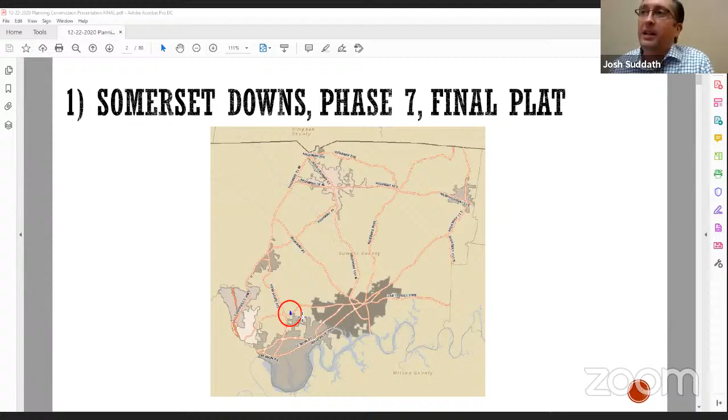Mr. Chairman, the first item on the agenda tonight is Somerset Downs Phase 7 final plat. What's being asked for is approval of 27 lots contained on 16.92 acres. The owner is Michael Shular. It's located on Luxborough Drive Extended, which has been extended for this phase. This subdivision phase adjoins Long Hollow Pike. There's no direct access proposed onto Long Hollow Pike though.

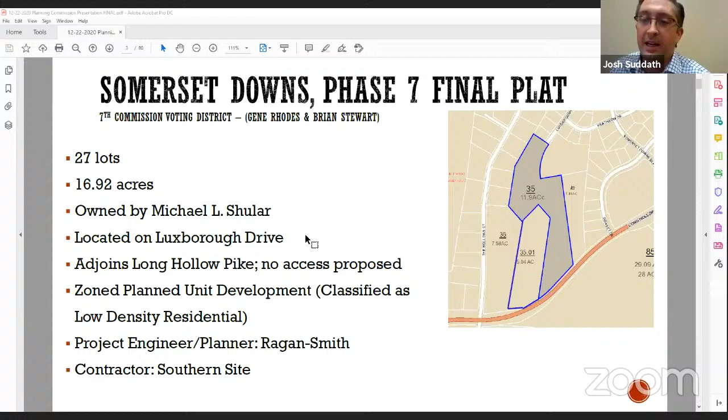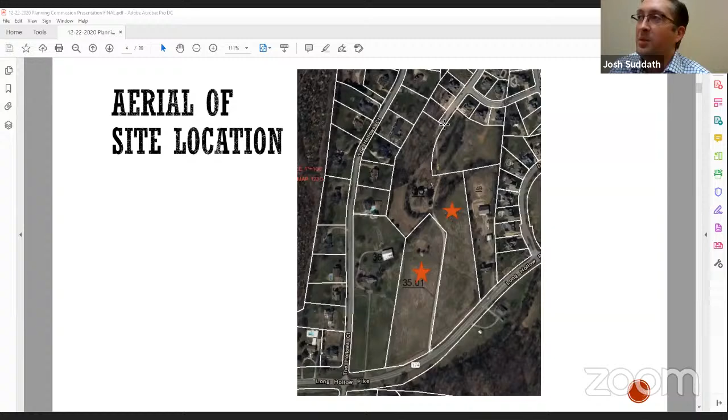It's currently zoned Planned Unit Development and was classified at the time of approval as low density residential Plan Unit Development. The project engineer and project planner is Ragan-Smith. George Welch and Jake Benson are the engineers of record on this project, and the contractor has been Southern Site Design. This is an aerial of the site location that you can see here. You see these two parcels that make up the entirety of Phase 7, and you can see Luxborough Drive here where it was to be extended.

A little bit of background on Somerset Downs. The Planning Commission is very familiar with Somerset Downs over the last few years, but it initially came up in 2006, had the first phases that were even before that under a different developer, but phases 4, 5, and 6 began back in October 2006, got through the approval process then. For phase 7, that was brought in separately in 2017, just before I started here at the county, and received approval by the county commission to amend the Plan Unit Development to add in this phase.

A preliminary plat was brought in by the developer for phase 7 in July of 2019 under the new subdivision regulations. And after they got preliminary plat approval, they began infrastructure installation at that time. It's been ongoing ever since. So about a year now, they've been working on getting the infrastructure in. This is the Plan Unit Development as it was amended in.

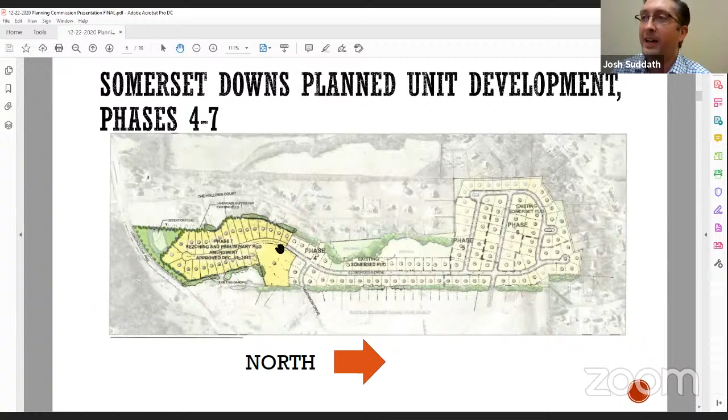This was an exhibit provided back in 2017. This zooms in on where phase 7 is located. This is the final plat that's up for approval here tonight.

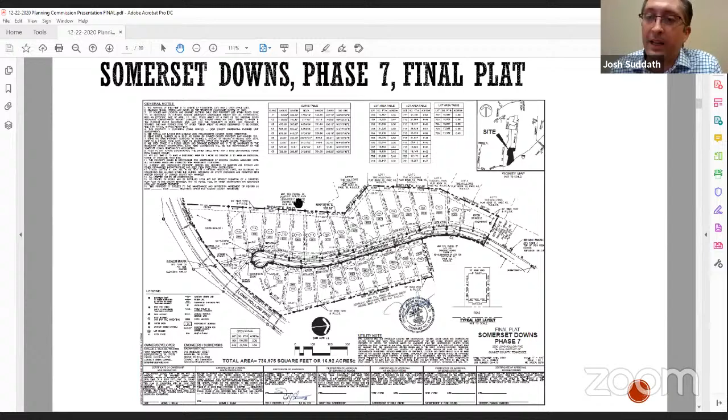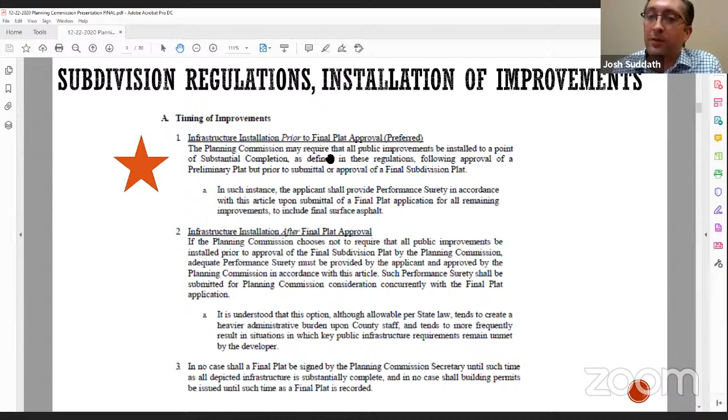It's been a requirement under the new regulations, and something that's benefited the county, that infrastructure be put in on these developments as they come through. When they get preliminary approval, they get their infrastructure in, then they come back to the Planning Commission. Our subdivision regulations lay that out as the preferred alternative: infrastructure in prior to final plat approval. It's been enforced for a while now and seems to be paying good dividends.

Water and sewer are to be provided by the White House Utility District. Fire hydrants are depicted along the proposed extension of Luxborough Drive, and they've actually been installed at this time, at the required spacing, meaning no lots more than 500 feet from a fire hydrant. I think they've actually got their spacing a little closer than that. Fire protection is to be provided by the relevant volunteer fire department, which I believe is the new Shackle Island Volunteer Fire Department.

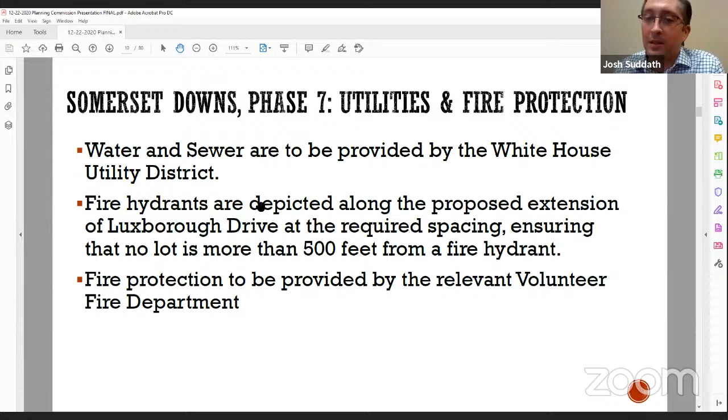As far as streets, Luxborough Drive has been extended to the south, and I've got some pictures of that here in just a few minutes that I'll show you. They've extended it about 1,350 feet, terminating in a cul-de-sac.

It's going to be a public street. The county engineer and his staff have been inspecting the street as it's been installed through the phases of putting down the base, the stone, and the binder coat that's on now, and the curb and all that. They've checked everything and conducted roll tests and everything like they're supposed to do to make sure it's done in accordance with county standards. And that has been done. That information has been provided to the highway department.

50 feet of right of way with 12-foot travel lanes, so a 24-foot wide road. This meets the county's requirements under which this plan was approved. Per the approved master development plan, sidewalks are to be constructed on one side of the road. That was approved for the entire Somerset Downs plan unit development back years ago, in 2006.

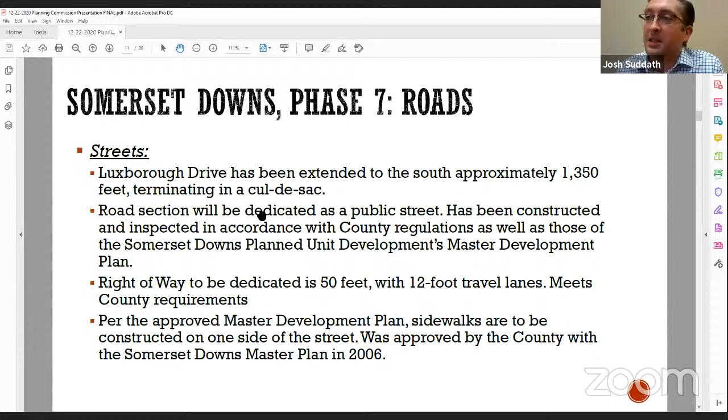On-site drainage: there are 3 stormwater detention facilities that have been constructed at this time. They've been functioning as sediment basins during construction, and they're depicted on the final plat. 2 of them are dry detention basins, which catch stormwater and release it during rain events. One is a water quality bioretention facility meant to satisfy the state's and the county's water quality requirements, capturing and filtering rainwater through layers of media. Those have all been installed. They may have just a little bit of work to go on the water quality pond, but they're real close, and that's not anything we have concerns about getting completed.

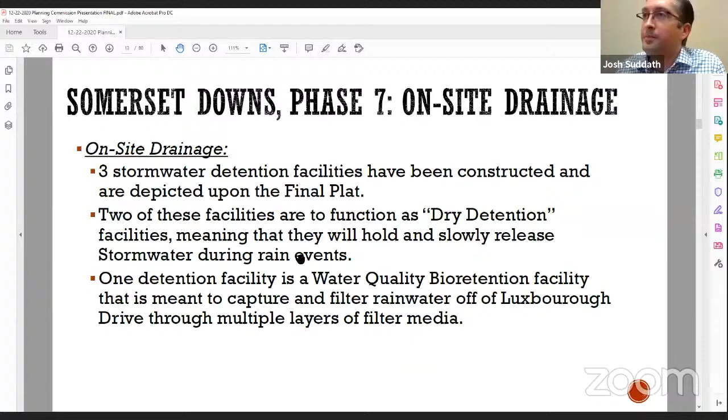On-site drainage, they turn in lots of calculations like we require them to do, and everything indicates that it's going to address water quantity and water quality.

Somerset Downs HOA will take care of all the stormwater maintenance over the long term, but during construction it's been the developer's job to take care of all that stuff. Once the final plat's recorded, they'll probably be selling these lots to Creekside Homes, and Creekside Homes is going to take over as the owner of the SWPPP, the Stormwater Pollution Prevention Plan, and they will be the accountable party for maintenance of the ponds and that kind of thing.

The developer is required to enter into a stormwater maintenance and inspection agreement with the final plat. They've prepared all that and turned it into the county stormwater manager, Joe Phillips. He's reviewed it and is good to go with it. They'll be recording that just as soon as they record the final plat, and that will bind the developer and then the HOA to acquiesce to us inspecting the ponds and make sure that they're taken care of.

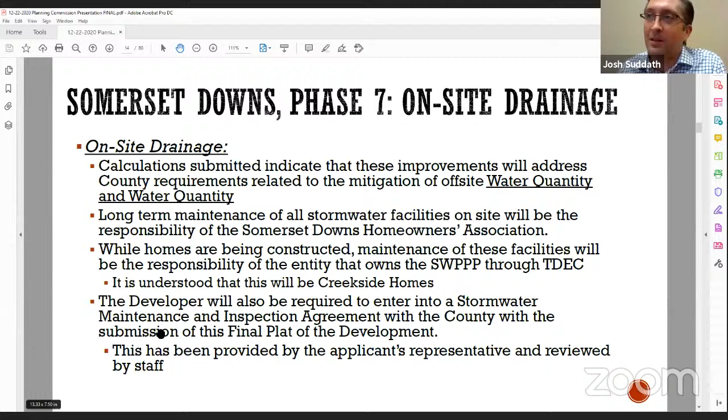This is just to show you where these ponds are. Pond 1 is here by Long Hollow Pike—it's a big detention basin, if you drive by you can't miss it. There's a much smaller water quality pond that takes that sheet flow, coming off of the road.

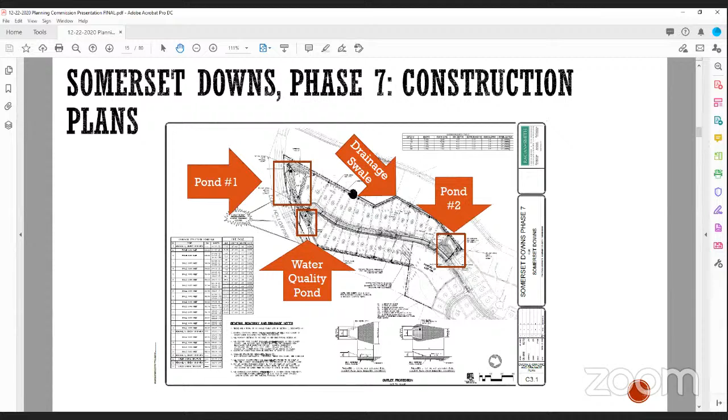There's a long drainage swale that they've installed that I'm going to show you pictures of in a minute. It goes down here to pond 2. We really spent a lot of time with the developer and the contractor. We had a lot of concerns about the Hollows neighborhood, who y'all heard a lot from over the years. We wanted to make sure they were not negatively impacted by this development to the extent possible of this phase. I think overall everybody did a real good job making sure that was the case.

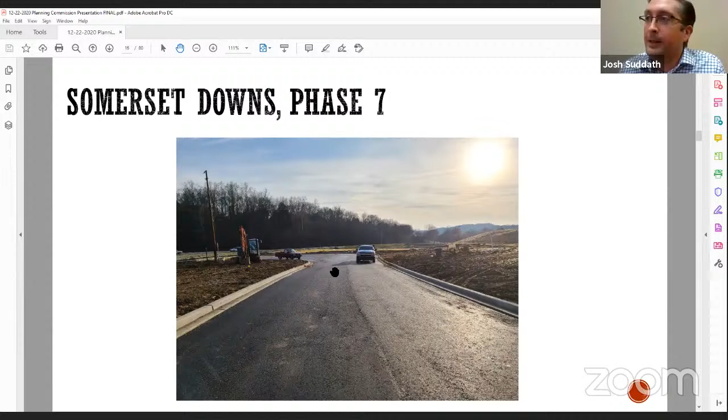So here's the few pictures I've been talking about. This shows you the state of the road right now. We require this now: before you start building the houses, you've got to have your road in, and before you can record that final plat, you've got to have your road in. So this is where it's at. It's got the binder coat down. They provided a bond to the highway department in an amount that's going to cover the top coat of asphalt, which will have to be put down in the next few years once they get the houses more or less complete. So the highway department is good to go on all that. That's just another picture of the road, as you can see here.

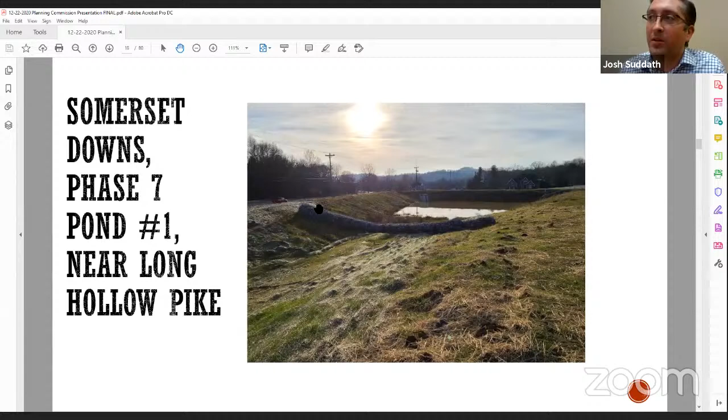This is detention basin number 1 by Long Hollow Pike. Here you see this red truck. They've put lots of measures in these gabion baskets to help slow the stormwater down and filter it, that kind of thing. This is the long swale that I was talking about.

Over here is the Hollows neighborhood. What we did was have them construct - and this is to the credit of the county engineer and stormwater manager, Joe Phillips and Richard Jones - this big swale right here. This was all built up in a way to try to keep that water from going off-site onto the Hollows and direct it where we needed it to go, which is here. This detention basin right here is where it all goes. This is the kind of stuff that having the county engineer and the staff we have now pays a lot of dividends, because they go out and make these folks - not necessarily make them - we work with them to make sure that stuff is done like it needs to be done.

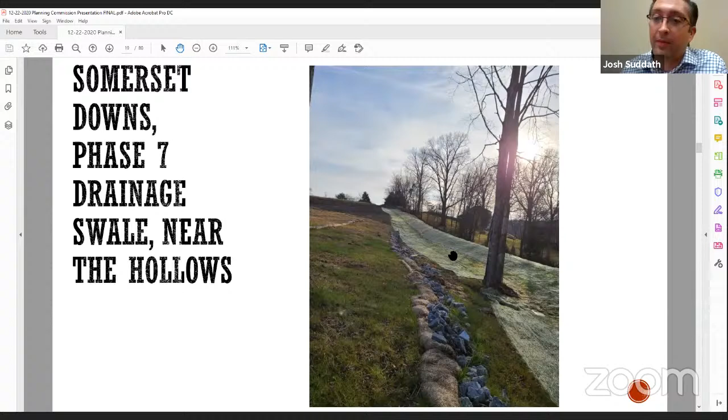And the contractor was incredibly responsive. The developer was very responsive, and the staff did a real good job coordinating. Early on in the construction we had some issues with mud getting off site. The contractor went out there, cleaned driveways, took care of it, and made field adjustments to make this swale deeper where we needed to, to make sure that stuff wasn't happening. So we got a lot of positive comments from the adjoining property owners, the Hollows folks, who really thanked us for how things have changed to handle these issues now.

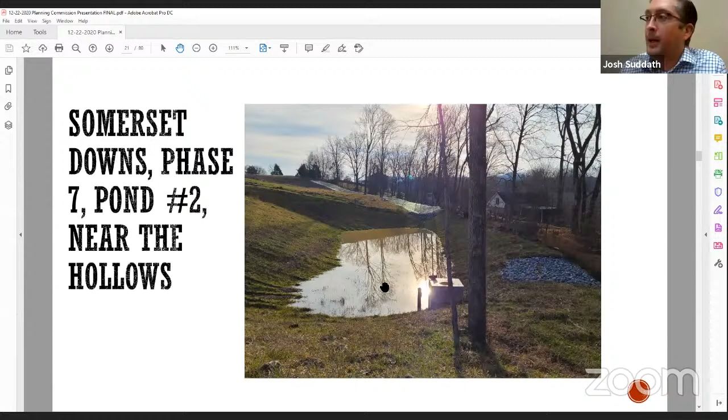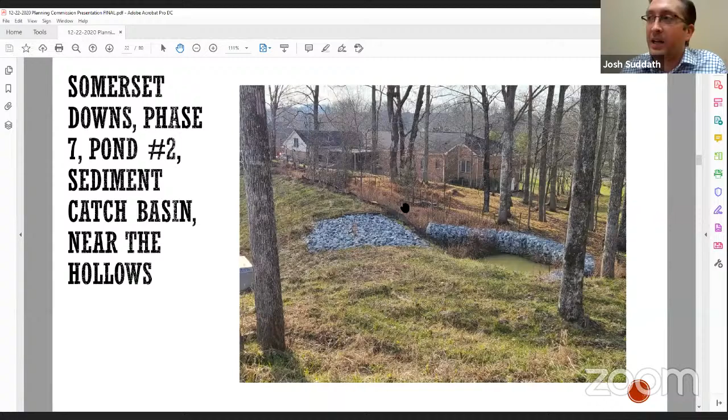And then you can see how the water flows here. This will be a permanent feature, and it's all going to be in a drainage easement, that entire swale. Basically that pond goes through a pipe here and collects additional sediment before it slowly escapes down toward the Hollows court, which is the natural drain. But it makes sure that it goes slowly.

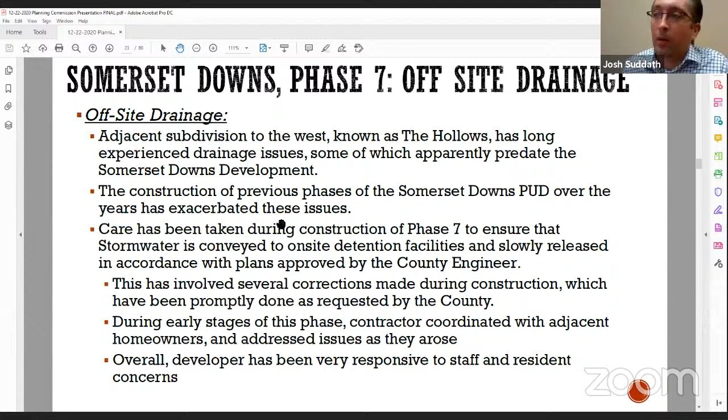So a lot of this I've already said. The Hollows has had a lot of issues over the years. We worked with everybody to make sure this phase went as smoothly as it could, without a lot of negative impacts on the surrounding property owners. Everybody did a real good job with that. I'm real happy with the way things went.

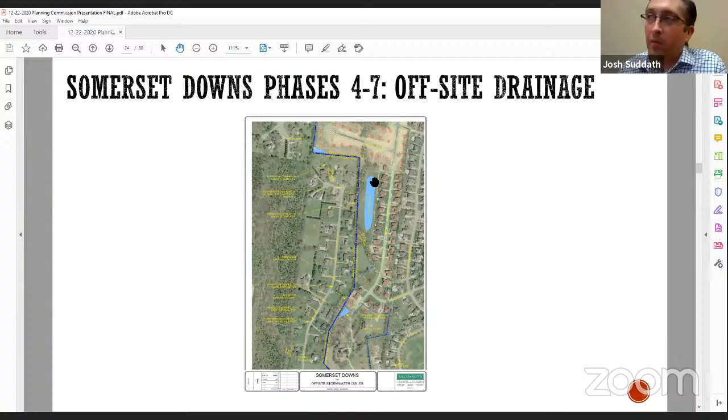Another issue we worked with the developer on, as the Planning Commission knows, is there were previous phases to this one where the county's process was different. There wasn't a lot of staff oversight or ability to oversee a lot of this stuff. So there were some things with previous phases left in a state that I wouldn't consider complete, and I don't think the county engineer would either. So we worked with them, and they've made a lot of improvements to fix a lot of that stuff, but there's one thing still hanging out there: this phase 4 and 5 big detention basin here that follows Luxborough Drive.

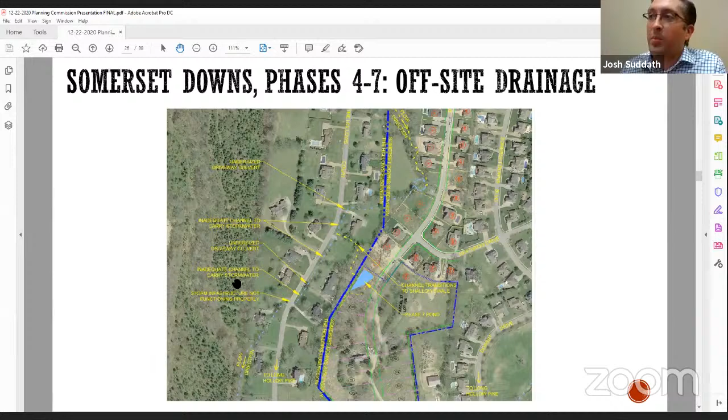It eventually flows and discharges in a similar spot to where this phase does, so there's a connection in terms of the stormwater between this phase and the previous phases. We want to make sure we're trying to get as many of those old problems solved now with this more or less final phase of the development.

That old pond was not necessarily built to plan years ago. There were some improvements we had them make, like a diversion berm and other things that helped. But we never got as-builts on that pond, and it got turned over to the HOA before it was really ready. It should still be managed by the developer now, so we've worked with the developer to look into remedying this and see what else needs to be done to get it into a permanent condition.

Phase 7 and the old phases all discharge eventually to the same point to some extent, so there's a connection between the earlier phases. We've obtained a commitment from the developer to provide a letter of credit to the county in the amount of $75,000 on this phase 4, phase 5 pond, that big pond there.

What that's going to involve is Ragan Smith going out to do a field survey and shoot as-builts to see if it was built to plan. If it turns out the pond's good to go and built to plan, nothing needs doing, that's okay. But if it's just functioned as a sediment basin and sat there for years, it may need to be excavated a bit and shaped before the developer goes on down the road.

They'll get those as-builts to us, and Richard, the county engineer, will determine what needs to be done. We'll hold that letter of credit to make sure it gets done, and we've got this in there as a condition of approval on this phase. We've talked with the developer and the project engineer on that today, and I think we're all on the same page there. This should hopefully sew things up and finish issues that have been hanging out there for a long time, along with everything done on phase 7.

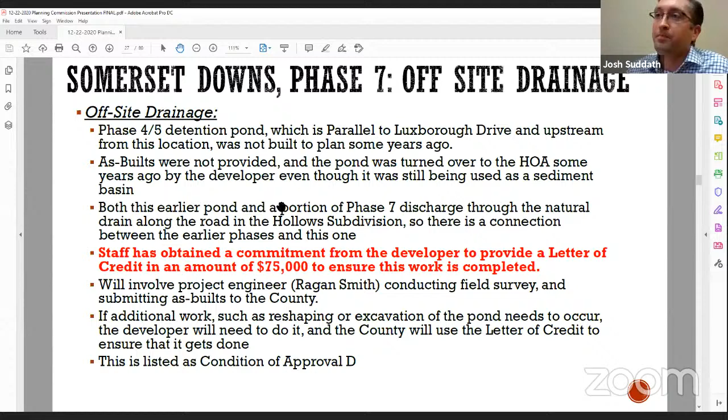So in summary, all infrastructure has been installed to a point of substantial completion. It's been inspected by staff. A bond's been provided to the highway department for the road, including surface asphalt whenever they need to install it. A letter of credit's been provided for 50% of the overall cost of stormwater to us in planning and stormwater here in development services. That'll ensure maintenance of these ponds over the next several years, so if anything fails, we can require it to be fixed. They've obtained all the signatures on the final plat except for mine, so that's good to go.

We'll do another ride-through just to make sure nothing's been missed. We always have it as a condition of approval that if there's any punch list items needing fixed, they'll need to take care of that. The as-builts have been approved—I don't know if I said that already, but those are good to go on phase 7.

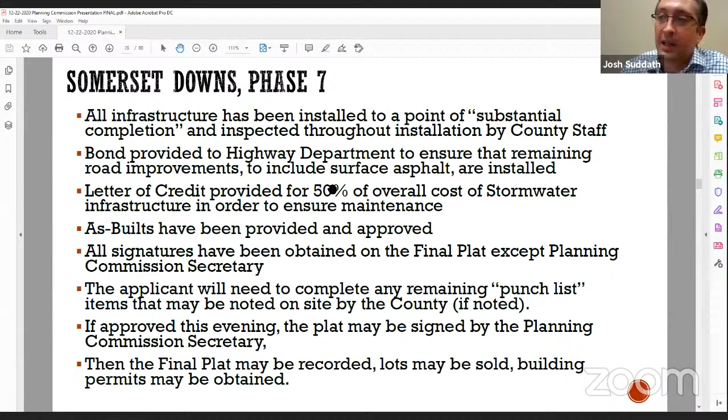So if you guys approve this evening, I'll be able to sign it tomorrow, or as soon as we get the $75,000 letter of credit I mentioned a minute ago. We'll hold the signature until we get that. Then once I sign it, the plat can be recorded, they can sell the lots, and they can obtain building permits.

The stormwater maintenance inspection agreement has to be recorded. They've given it to us; they just have to record it with the plat. They have to maintain all their bonds and letters of credit until we say they can release them.

The other two options would be to approve it without conditions or to deny it. So, Mr. Chairman, that concludes my presentation. I know George Welch and the developer, Brian Carroll, are in attendance tonight and can answer questions if the Planning Commission has any.

Would any one of the representatives of the owner like to speak or comment? This is George Welch with Ragan Smith. I think Josh did a very thorough job. We have nothing to add, but we're certainly welcome to answer any questions if you have any. Anyone else? Any questions from the developer or his engineer?

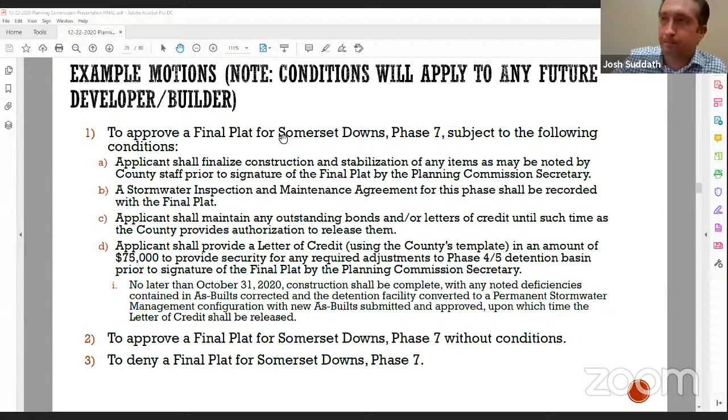Mr. Chairman, with item number 2 deferred, the next item on the agenda is Laurel Park, formerly the Westbrook Development, Phase 1 preliminary plat. This segment of the development consists of 34 proposed lots on 13.21 acres, owned by Tennessee Home Sites. The builder, as I understand it, is Patterson Homes, a firm that's active here in Middle Tennessee. They've done a lot of work in Williamson County and a few other counties around Middle Tennessee.

This project is located on Long Hollow Pike. It's zoned planned unit development, classified at its approval as a medium density residential planned unit development. Utilities are provided by White House Utility District. The project engineer and planner representing this project is CSDG, Civil Site Design Group.

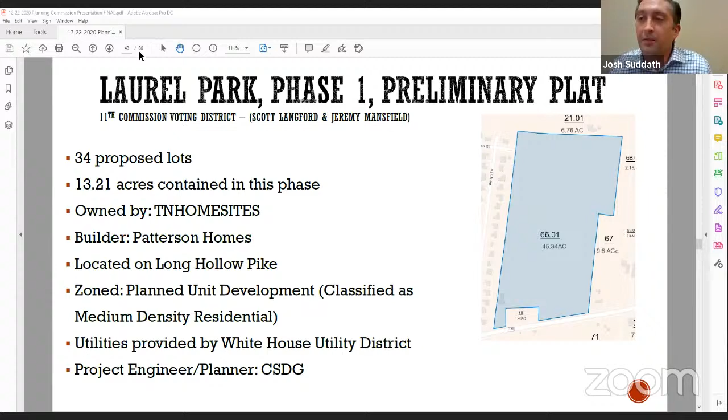This is an aerial photo of the project location. As I said, this is the Westbrook development that was approved some years ago. Kellen Lane is over here -- I think this subdivision is called Victoria Place subdivision. This is the Cumberland Presbyterian Church next to it, and then Beech High School is off just to the east.

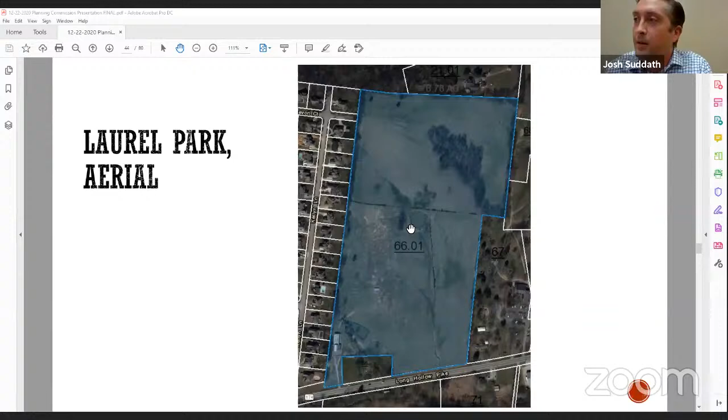The street view of the site shows some rolling topography with a natural drain flowing through, almost to the center, slightly off center of the site. I want to give a little background, Mr. Chairman, if I can, on this one. Like I said, it's been around for a while, kind of kicking around. They had a lot of issues with TDEC that they had to get worked out before they could come back and get to this point.

It was originally approved. The final master development plan was approved by the Planning Commission in December of 2017. That was after it had been approved for rezoning and a preliminary master development plan by the County Commission the same year.

After they got those approvals, it's my understanding that there were a lot of issues encountered that weren't totally anticipated with TDEC, as far as there's a ditch located on this site that TDEC classified as a stream harboring aquatic wildlife and that kind of thing. And it brought the project pretty much to a halt for a number of years.

This eventually got resolved, I believe, earlier this year. So following TDEC approving their solution offered on this, the changes that TDEC required had to be worked into the revised master development plan. So they submitted that basically under the new zoning regulations on November 6, 2020.

As part of that, the request was to change the name of the project from Westbrook to Laurel Park, which is not a significant change. It's a name change.

Staff reviewed it. The Planning Commission may remember an email coming out about this, or several emails coming out about this. We reviewed what was submitted in order to determine whether it was a major change, which would mean it has to go to the Planning Commission and the County Commission, or a minor change, which can be approved by staff.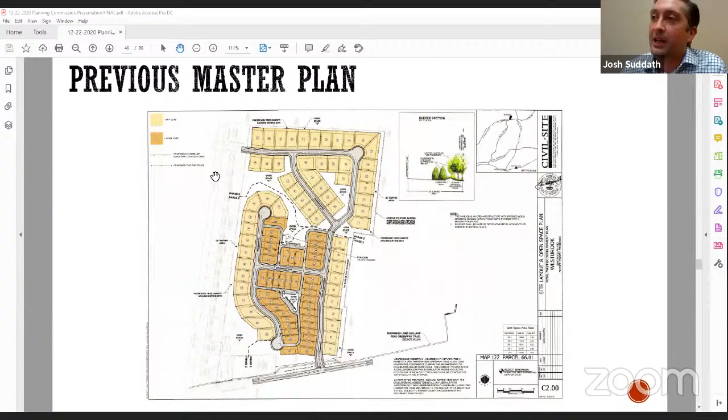The biggest change is right down here. This right here is where the change occurred. This is where that stream I was talking about, that pond that comes down here and drains toward Long Hollow Pike. This is a natural stream, and TDEC required this area to be set aside as a conservation easement, is essentially what happened.

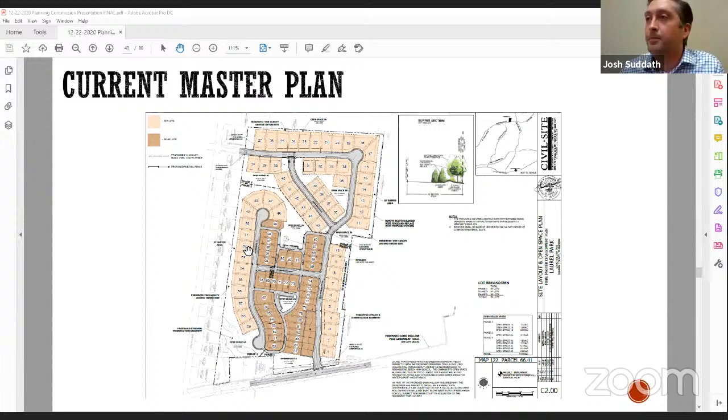And so that's the biggest change. And to accommodate that, they had to shift some lots over. If you look, you'll see how they just kind of shifted a little bit and changed. But there's nothing substantial that changed with this subdivision or with the development.

And so the status of it, with it being approved administratively, the county's adopted a new set of zoning regulations, and the applicant has revised the plan to meet all those requirements. What that means is that their master plan has about twice as many pages as it did before, because we require a lot more detail. We've got a lot more landscaping detail and that kind of thing than what we had initially.

And the plan was revised under the new regulations November 10th, 2020. What that means is they have a year to get a preliminary plat approved, which they're requesting approval of tonight. And they have until November of 2023 to get a final plat approved, which means they got to have all their infrastructure in to get that final plat approved.

The preliminary plat, likewise, was approved the same night three years ago. We had them submit a revised preliminary plat, and in looking at it, we determined that the Planning Commission needed to review this preliminary plat tonight.

The preliminary plat has different thresholds than the overall master plan because it's really a construction document. It's very detailed and spells out exactly what is to be constructed. We felt it needed to go back to the Planning Commission because it technically expired, and because they had made some changes that are called out in the subdivision regulations as a reason to amend or get a renewal on a preliminary plat.

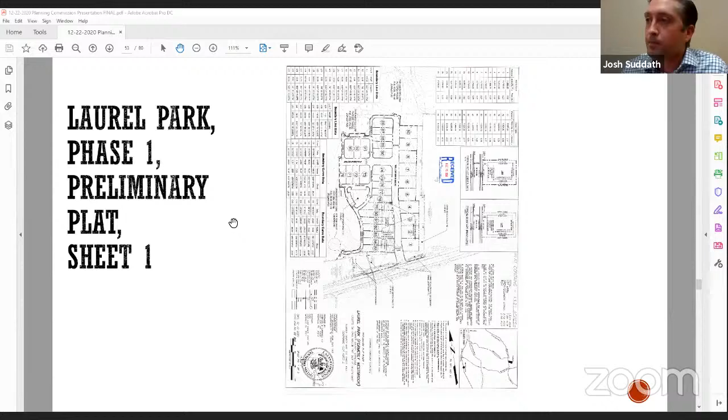So this is the phase one preliminary plat. I reoriented this one so it's north to south here. You see Long Hollow Pike, and these are the lots proposed for construction under this phase. This zooms in a little bit so you can see the plat and the lots contained on it.

Just another plan sheet, and this is the final sheet, the northern segment of phase one.

What's proposed, both in the master plan and the plat and construction plans, is that the development will require the widening of Long Hollow Pike. That's all indicated on the construction plans and the preliminary plat as it needs to be. We've got it as a condition of approval that Long Hollow Pike has to be widened in accordance with those plans for phase one, so they're not going to be able to record the plat or sell lots until that's done and open for traffic.

The internal road network will be dedicated as a public street, built in accordance with the county's subdivision regulations as well as the Laurel Park Master Development Plan. The right-of-way is to be dedicated at 50 feet with 12-foot travel lanes, which was what was approved in the original approval by the county commission.

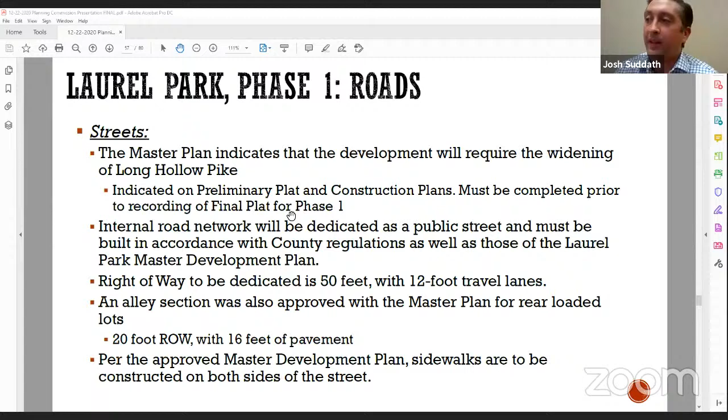Some of these lots are going to be rear loaded, which I'll show with an alley section in a minute. That was approved with the master plan: a 20-foot right-of-way with 16-foot pavement for those rear alleys. Per the approved master plan, sidewalks are to be constructed on both sides of the street.

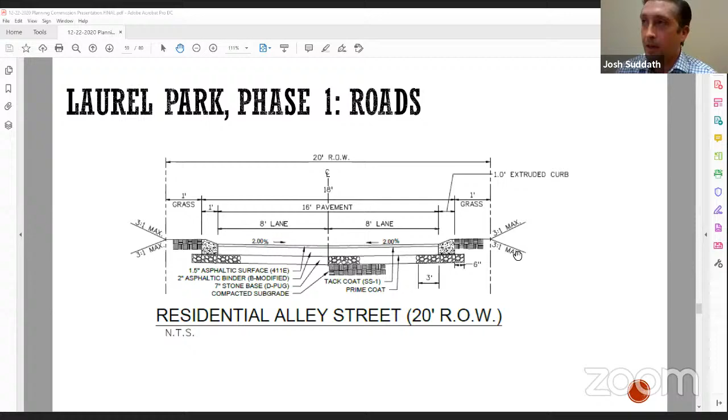This is from the construction plans, and it gets very detailed on what they turned in for Long Hollow Pike improvements. You see there's a left-hand turn lane that's going to need to be added, and additional spacing, so that along most of the frontage Long Hollow Pike will have to be widened in accordance with a traffic study turned in some time ago. This zooms in further, and you'll see there'll be a right and a left turn out, and one lane in, here into the subdivision.

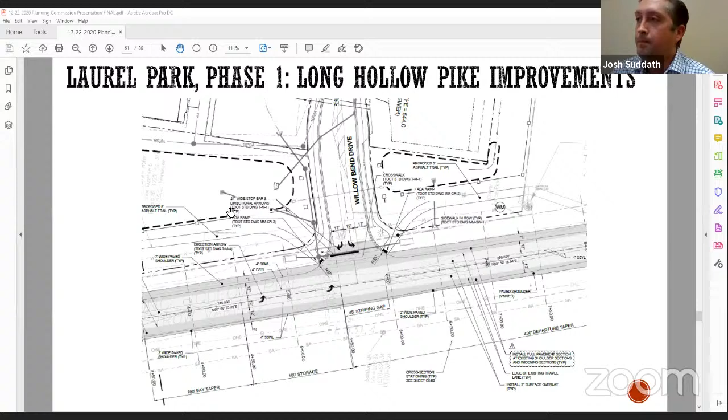There's a greenway connection that was originally proposed with the initial approval. That has not changed in any way with what's before the Planning Commission tonight. What was required is that there's a greenway needing to connect going back east toward Beech High School. The original approval, which I'll show the wording for in a minute, allowed for a payment in lieu for that segment, or for the developer to install it after the county acquired the right-of-way.

So the developer is proposing to construct the greenway along the entire frontage of the project site, and to provide an in-lieu-of payment for about 1,100 feet of this greenway that would head east over to Beech High School.

This is allowed per the terms of the master development plan. Our regulations require that 3 cost estimates be obtained, and the amount paid is the average of the 3 plus 10%, so 110% of the average cost provided. They did that, providing us with 3 separate cost estimates from 3 separate companies, with an average total cost of $48,465.27 for that in-lieu payment.

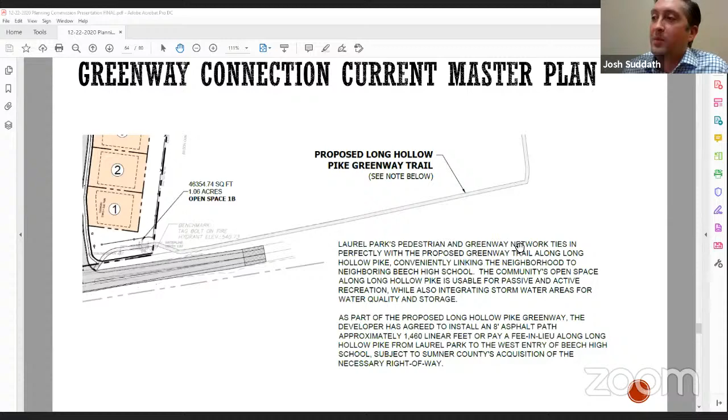This is the wording from the original master plan approved in 2017, and this is what's in the new revised master plan. It's verbatim exactly the same, so they weren't seeking to amend anything related to this.

On-site drainage: the construction plans and drainage calcs have been turned in. Richard Jones has reviewed them a couple times, and they've gone through some significant revisions. There's 3 stormwater detention facilities depicted in phase 1, and basically everything is designed to make sure you don't have an increase in stormwater runoff post-construction. That's the goal. During construction, they capture silt and mud on site to make sure it doesn't escape.

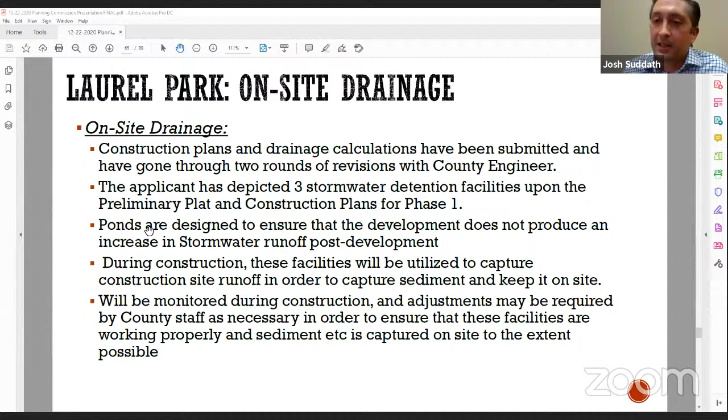We'll monitor that like we always do. We check it very regularly. Joe Phillips personally takes on the responsibility of inspecting these construction sites for stormwater compliance. He's the stormwater manager, and he takes the monitoring of the development pretty seriously. Anytime they need to make adjustments, we get with the contractor and the engineer. We make sure that gets done, and we have the ability to stop work if we have to.

Overall, the calculations will address water quantity and quality requirements. There'll have to be a long-term maintenance agreement. The HOA will take care of everything in the long term; in the short term, the developer will take care of it. We'll need that maintenance and inspection agreement when they come back for final plat approval, just like Somerset Downs did a little while ago.

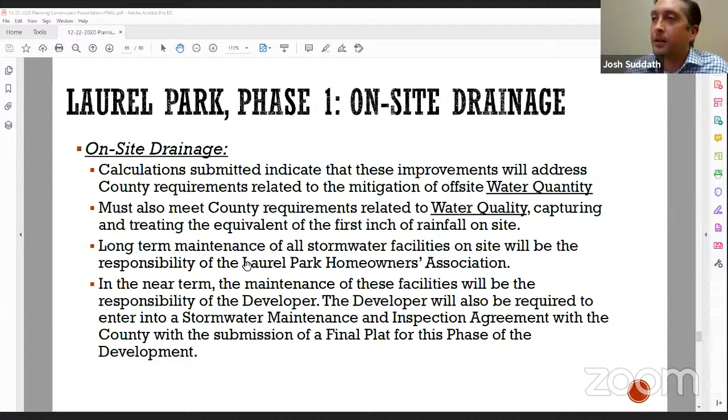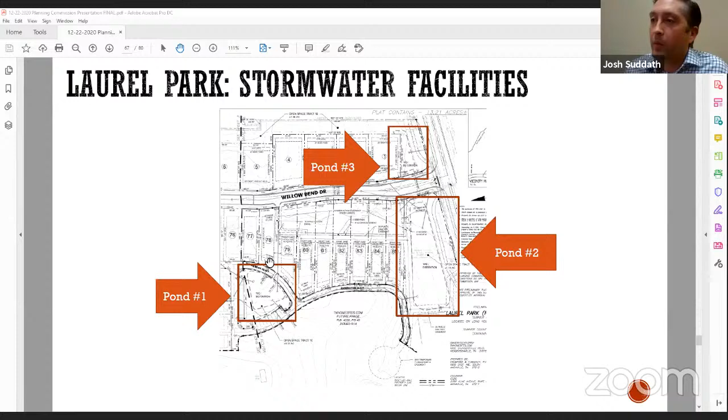These are the 3 ponds I was talking about. 2 of them are here—this is oriented kind of wrong, the north is over here—so these 2 are over here by Long Hollow Pike. And you've got 1 up here with some common open space. That'll be a water quality and detention basin.

Other amenities: there's additional amenities with phase 2, like an open fireplace and public gathering type areas. With phase 1, a lot of the green space is used for stormwater control and that kind of thing. But within phase 1, the post office requires them to put a mail kiosk in, so they've got this mail kiosk planned for open space 1C. You can see the off-street parking that was required to help accommodate a lot of these rear-loaded lots, which will also help make sure people can park to get their mail.

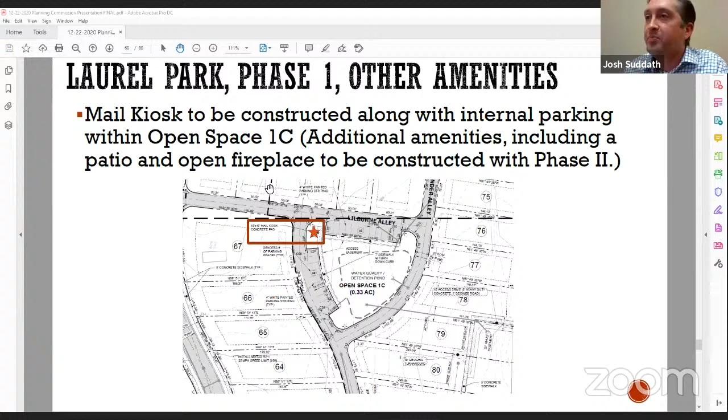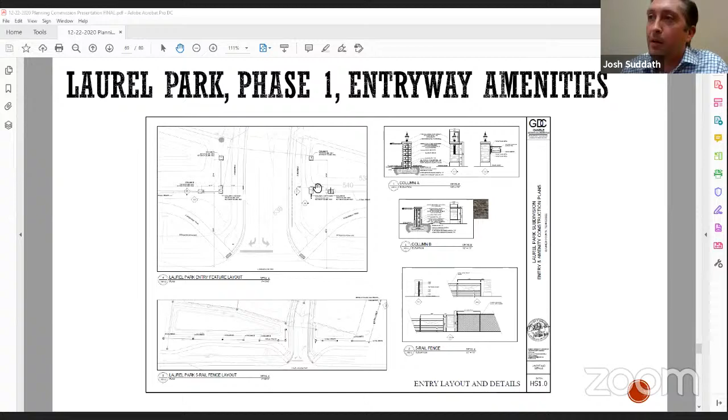Along with that, some things they've turned in now that we didn't get initially some years ago: entryway amenity plans and that kind of thing. You can see there'll be a fence across the frontage of the property, with brick columns and that kind of thing. Internally, I believe it's planned to have some street lights as well.

You can see the signage is very, very close to what was originally proposed for the Westbrook development, and you see the street lights proposed here. We don't get into the kind of design review that a lot of cities get into. Hendersonville, for example, would have separate meetings just about the brick and that kind of thing—we're not permitted by state law to get into that level of design review detail. But what they've turned in is adequate for the county's requirements.

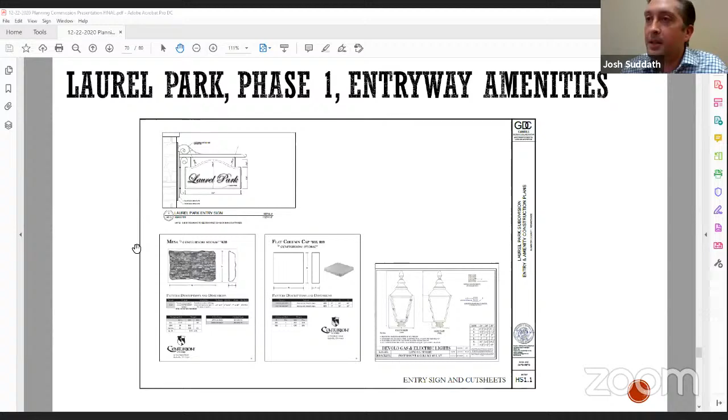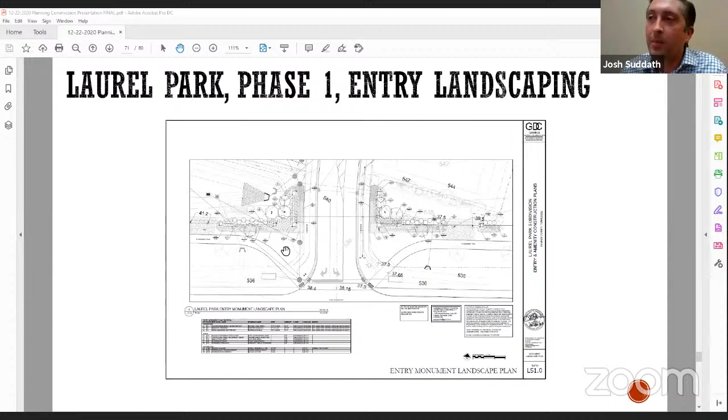They've also provided landscaping plans for the entryway, spelling out what needs to be planted, spacing, and that kind of thing.

Utilities and fire protection: water and sewer are to be provided by White House Utilities, and we've got an availability letter in our files on this one—I got an updated one the other day from White House. Fire hydrants are going to be at the required spacing. The Volunteer Fire Department is right across the street—that's the New Shackle Island Volunteer Fire Department. It was a condition back when this came 3 years ago that the HOA will contribute an annual amount to the New Shackle Island Volunteer Fire Department. We're going to make sure that continues to be a requirement for the Laurel Park development, just like it was for Westbrook.

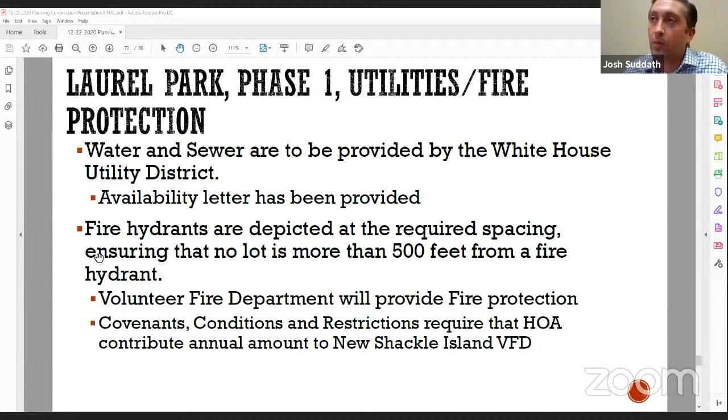General next steps, following approval of the preliminary plat: they have to get all their infrastructure in. The county will inspect along the way. They have to call us 24 hours in advance of any major step, if they're putting pipe in or putting the road base down or anything like that.

Once the infrastructure is substantially complete, they'll need to bond any remaining improvements with the road department for the roads, get us the letter of credit in the amount of 50% of the cost of the stormwater infrastructure, and get us as-builts so we can confirm that the ponds are where they're supposed to be and levees are where they're supposed to be and that kind of thing. Once they've done all that, just like what we saw with the other development here a minute ago, the final plat may be recorded and the lots may be sold.

The first one is that we're asking it be required that the county engineer stamp his approval on the construction plans, and they have a pre-con meeting with us prior to them getting a land disturbance permit. That's standard. The applicant shall construct the required greenway along the frontage of the subdivision to the east and west property boundaries, as shown on the construction plans, prior to the recording of any final plat.

Prior to issuance of the land disturbance permit, before they can start work, we would like to get that in-lieu-of payment provided to the county in the amount of $48,465.27. The applicant shall construct all depicted improvements to Long Hollow Pike and have them open for traffic.